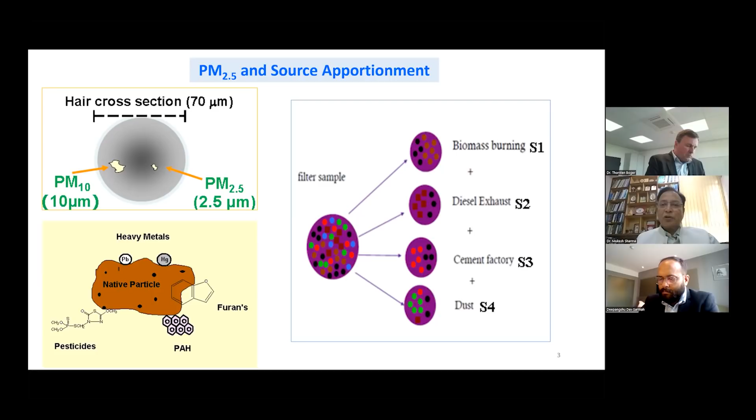This is happening at many levels and many institutions - Central Pollution Control Board, Government of India, and many state governments are doing the same thing, trying to identify what the sources actually are. So this is the juncture where we have to really seriously focus on pollution control.

If we don't, these are the baseline scenarios or business as usual that might happen. Already in the Indo-Gangetic Plain or Ganga Basin, we have very high pollution levels, and they're going to expand in length and breadth. Many other cities and areas would become more polluted if we don't do anything, and by 2040 the situation could be even worse.

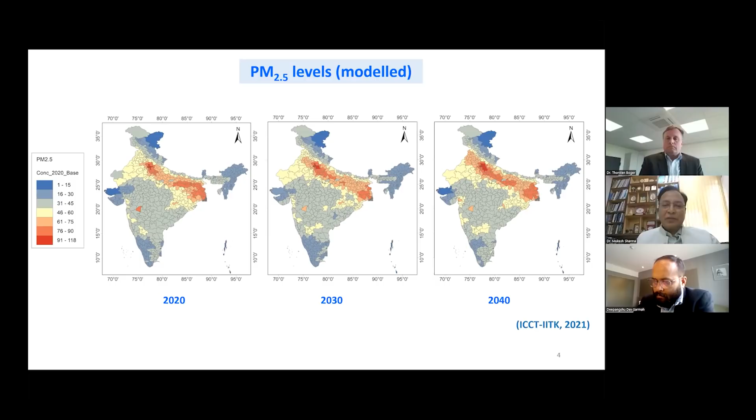Well, these are just projections, but the significant point is that we have to act now, because there's no more delay we can afford. And as I said, everyone is serious. This is the profession I'm in, and I can see at all levels there's great urgency, which is a very good thing.

So let's move on to what we have been doing. The really remarkable thing is that we are taking vehicular pollution very seriously and we have leapfrogged - we all know how quickly we jumped from BS4 to BS6. We actually skipped BS5.

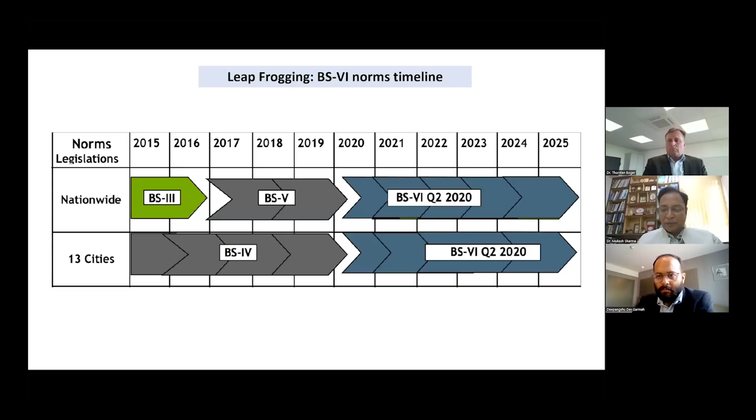That's really good news. It'll take some time for the BS6 fleet to make its inroads onto the road, but we have to wait for that. The tone is set and we are going in the right direction. But the point is, we also need to see how we can make things even better.

On the left-hand side is a typical picture I've taken from a friend at ARAI. They do this testing, and ICAT also does this testing of vehicles. For testing vehicles, what you require is a certain cycle of operation at the laboratory level.

To start with, I'd draw your attention to the blue lines - that was our IDC, our Indian Driving Cycle. That was modified, and what we got was MIDC, because the time period was short and the speed was shorter, so we could not capture emissions correctly for how vehicles would move differently than what the driving cycles showed.

So we moved to MIDC, the Modified Indian Driving Cycle, shown in red or orange. We did pretty well in that we came very close to NEDC, the New European Driving Cycle. We kept trying to capture more, but as the science progresses and we learn more, we come to know there's always scope for improvement.

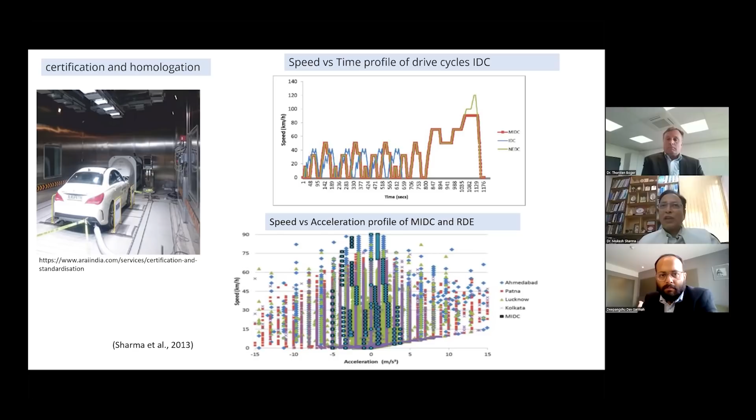So therefore, the question arises, well, is MIDC good enough to say that our vehicles are good? Undoubtedly, our improvement has been tremendous, but then we have to really see how they would perform once they're on the road. So these pictures give you the background, and they also say we certainly need to go forward beyond MIDC because we are not quite capturing the acceleration and the speed, which is a very important parameter.

So this is another picture. Whatever we are feeling now, the Europeans, which we tend to follow, had a similar situation, and they thought as the vehicle technology is changing, the speeds on the highway are changing, and they came up with what is called WLTP on the top, actually. And there are 3 cycles. Let's not worry about those 3 cycles, but they have definitely modified. What they have done is increase the time scale, increase the speed range, and have 4 different slabs, if I can say, of how the vehicle should be tested.

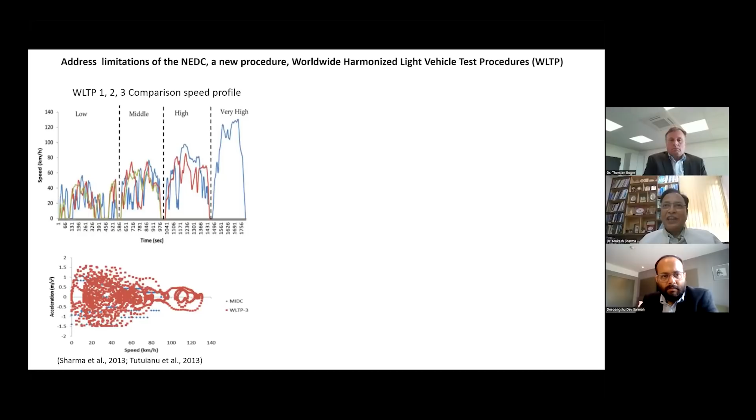So they came up with a new system, WLTP, which is sort of a procedure. And within that procedure, there will be different cycles. So on the bottom also, the interesting thing is that WLTP3 covers a large range of acceleration, both on the positive side and the negative side. So even in laboratory testing, we are going more toward the realistic side.

So in summary, if we compare the 2 cycles, NEDC, which India is closely following now through MIDC, there are a lot of differences, and NEDC for us is nearly MIDC. So this picture is showing there are many changes that we have to bring to be a world-class testing procedure. I don't want to go into the specific details, but let's take an example, the average speed. NEDC is capturing about 34 kilometers per hour average speed, whereas WLTP goes to more than 46 kilometers per hour. So we need to very thoroughly examine WLTP, and probably it will fit very well to the new conditions.

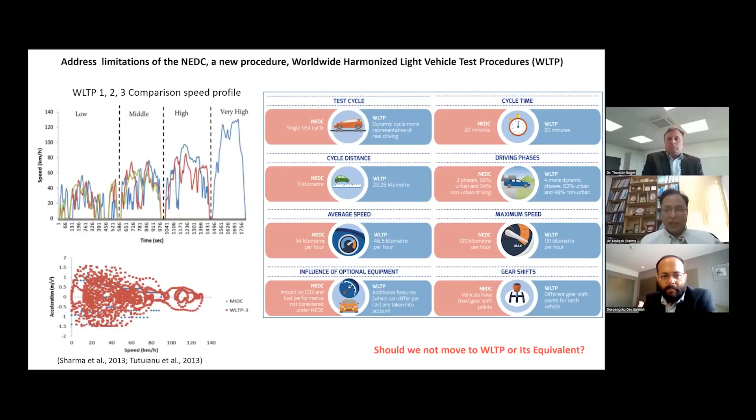And therefore, the question that I pose is, should we not move to WLTP or equivalent in a reasonable time frame? We know that things cannot be changed overnight, but this is the time to very seriously look into these things, as the technology and the understanding increase.

Now the question comes, even if we go with WLTP, there are still issues with WLTP, and the general scientific community is asking, what about actual emissions on the road? That's what we call real driving emissions. And they may be very different because our road conditions are different, our acceleration and deceleration patterns are different, our highways are different, the speeds have increased. The vehicle is driven all through; it's not expected to be on a particular road under particular conditions all the time.

And obviously, we have to make sure that we are able to analyze the data, just to make sure that, while the vehicles are on the move or expected to be moved when they come onto the road, how would they likely perform? And we have to make sure that this testing is done so that the vehicle that's coming out from your factory is a ready-to-go vehicle, even on the road in realistic conditions. And then even at that time, the emissions are held back within certain limits. So that is the idea of RDE.

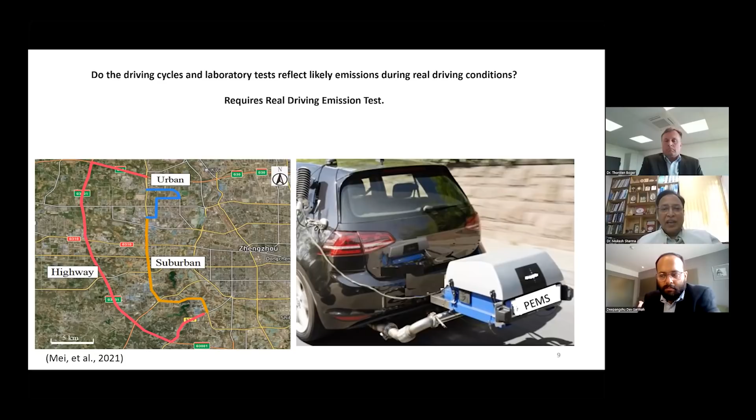And again, RDE is not a simple thing. Of course, it is challenging. Therefore, we are discussing it, because we require a trip selection that I've talked about with the map. It concerns the overall traffic, and our traffic is very different actually. We all know how challenging our traffic could be.

The physical conditions, temperature, pressure, meaning altitude I'm talking about, humidity, road conditions, fuel composition, engine technology, OBD, which stands for onboard diagnostics, and the PEMS response. PEMS response is also very important because the response has to be instant because the vehicle is moving, and response time is slow. So the PEMS, even though they can be of very good quality, there could still be certain

So again, there's another important parameter, which is the conformity factor. The conformity factor is a factor which is not to be exceeded, having accounted for some variability in PEMS, because with the PEMS there's uncertainty. So that factor applies to the emission limit. Generally the conformity factor would be more than 1 because we are accounting for the

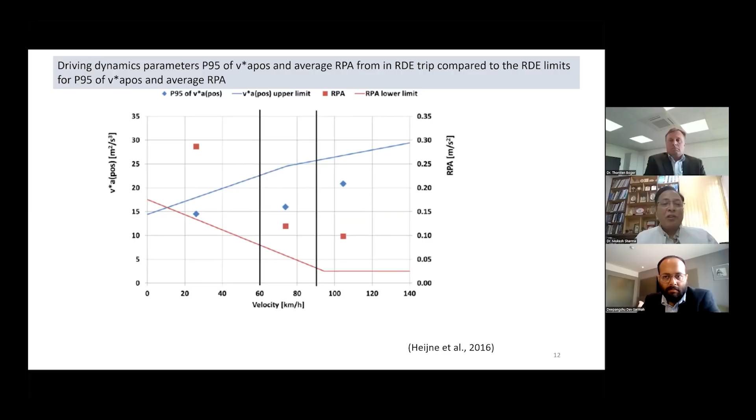And as I said in the beginning, we have to move to WLTP. Speeds have to go up for the testing because our highways are now going up to a maximum of 120 kilometers per hour.

And then the rush hour, low speeds we have to test, because most of the time as we go routinely daily to our office, that's where we are going to encounter the maximum emissions. So that should also be part of RDE. PEMS that I talked about, their sensitivity, their good quality, their specifications have to be brought in, have to have the right test. And then finally, we also have due diligence with GPF, and that has a lot of potential for reducing both particulate number and particulate matter concentration.

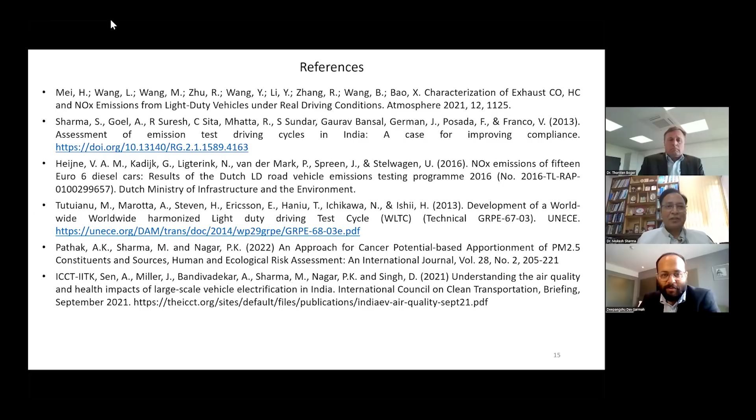Okay, so thank you. And also thank you for letting me talk at this event. What you will see is that there actually will probably be some overlap with what Dr. Sharma just said, and I will kind of repeat it with my words. Overall, obviously, India has made significant steps when it decided to do the transition directly from Bharat Stage 4, which was roughly equivalent to Euro 4, to Bharat Stage 6. And I'm happy to provide some overview of how we at Corning see regulations in other parts of the world evolving, and I'm hoping that this might also help the further development in India.

As a quick comment, I will focus a little bit on the passenger car side because that's the sector I'm mostly following in my current function within Corning Environmental Technologies. However, the same general thoughts obviously apply also to heavy-duty applications. Now, looking at the current and anticipated future emission regulations from a global perspective, what we can say, and I think it has been said before, is that Europe is leading with respect to emission control requirements.